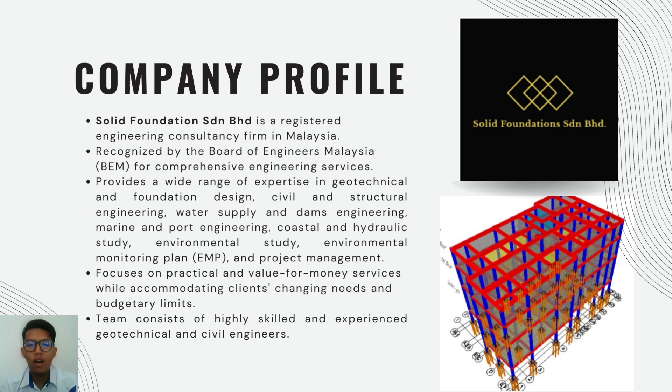Next, about the company profile. Our company name is Solid Foundations Sdn Bhd, a registered engineering consultancy firm in Malaysia. We are recognized by the Board of Engineers Malaysia (BEM) for comprehensive engineering services. We provide expertise in geotechnical and foundation design, civil and structural engineering, water supply and dams engineering, marine and port engineering, coastal and hydraulic study, environmental monitoring plans, and project management. We focus on practical and value-for-money service while accommodating clients' changing needs and budget limits. Our team consists of highly skilled and experienced geotechnical and civil engineers.

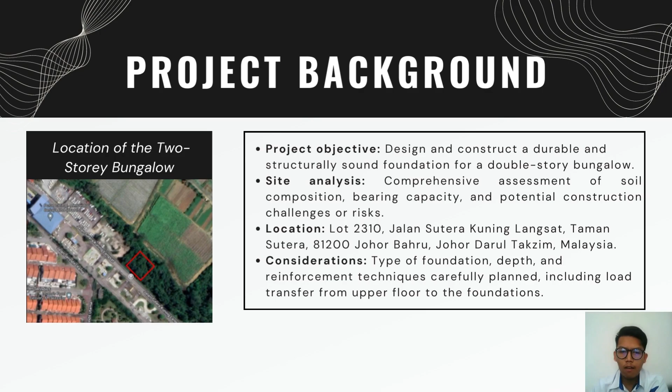Next, for the project background: the project objective is to design and construct a durable and structurally sound foundation for a double-story bungalow. The site analysis is a comprehensive assessment of soil composition, bearing capacity, and potential construction challenges. The location is Lot 2310, Jalan Sutera Kuning Langsat, Taman Sutera 81200, Johor Bahru, Johor Darul Takzim, Malaysia. The consideration covers the type of foundation, depth and reinforcement technique carefully planned, including load transfer from the upper floor to the foundations.

Assalamualaikum and hi, I'm Muhammad Syahrin bin Azahar and I will be presenting our literature review, starting with site investigation. It is an important part of the foundation project which gives significant knowledge about the geotechnical characteristics and ground condition of the site. It is a methodical and thorough investigation of the location to acquire the information required for planning and building a solid and secure base.

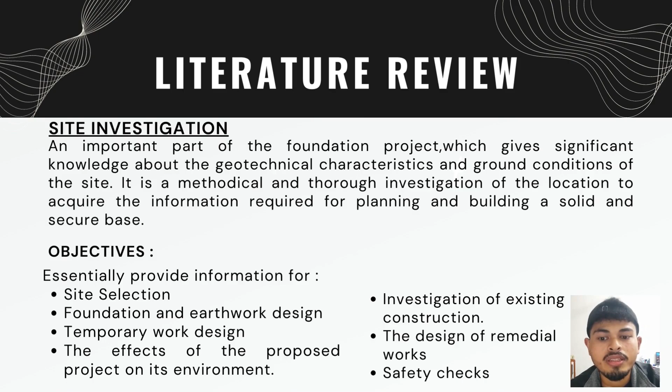The objective is essentially to provide information for site selection, foundation and earthwork design, temporary work design, the effects of the proposed project on its environment, investigation of existing construction, the design of remedial works, and finally safety checks. There are basically 4 components or phases in site investigation: Phase 1 is literature search, Phase 2 is reconnaissance and subsurface exploration, Phase 3 is laboratory testing and reports, and Phase 4 is detailed site investigation.

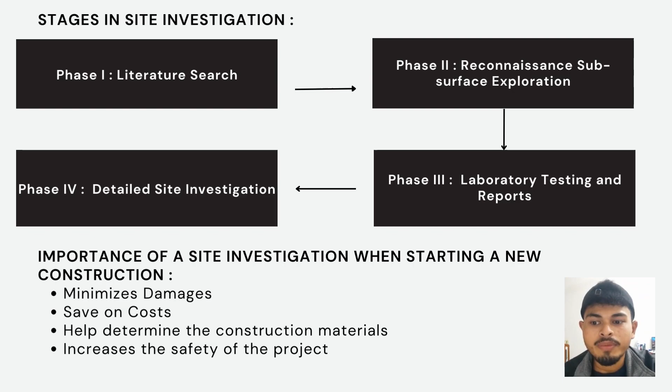The importance of a site investigation when starting a new construction is basically to minimize damages, save on costs, help determine the construction materials, and increase the safety of the project.

Next, we jump to borelog data. The term borelog data refers to information gathered during the drilling and sampling of a borehole or well, also known as geotechnical logs. Borelog data normally consists of a variety of measurements and observations depending on the goal of the drilling and the necessary information. For our project study, we selected borehole 1 for borelog data analysis.

From the figure we can see an example of the borelog data that we used. From this borehole data, we managed to identify the type of soil and all the data and information needed to make the calculations.

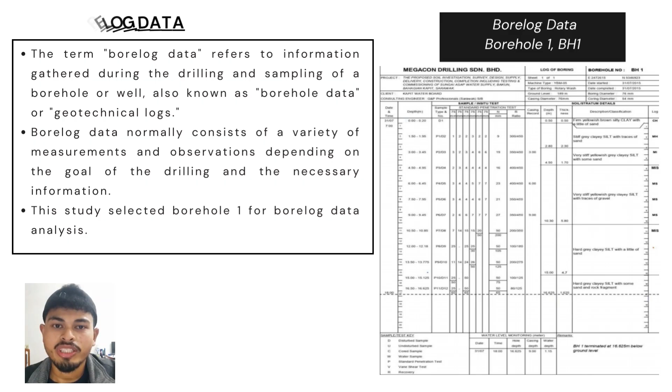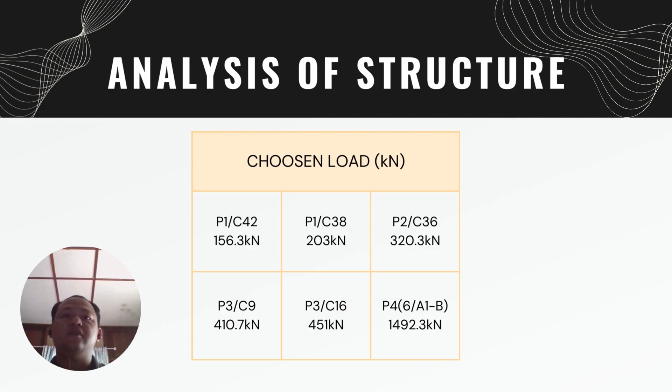Now we go to the methodology of our project. First, we calculate the bearing capacity and settlement using the Meyerhof method in clay, assuming phi is 0 degrees. Then we calculate Qs using the lambda method because it is clay soil. Then we calculate the ultimate Q, which is the ultimate load, assuming group pile. Lastly, we check the settlement using the Meyerhof method.

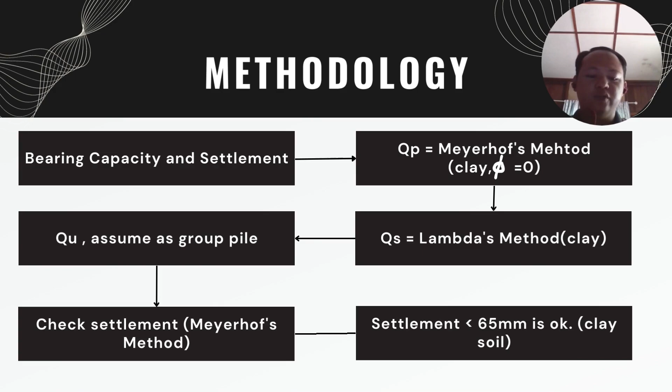The settlement under 65 mm is okay because it is clay soil. Only P3 is not okay; the others pass for the settlement.

Hello, my name is Asyikin binti Muhammad Azhari and I will explain about the pile calculation.

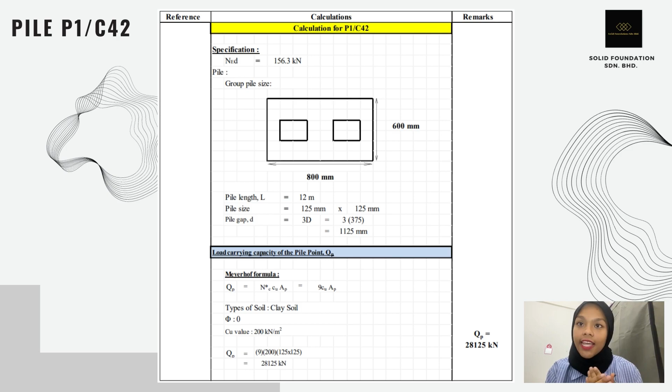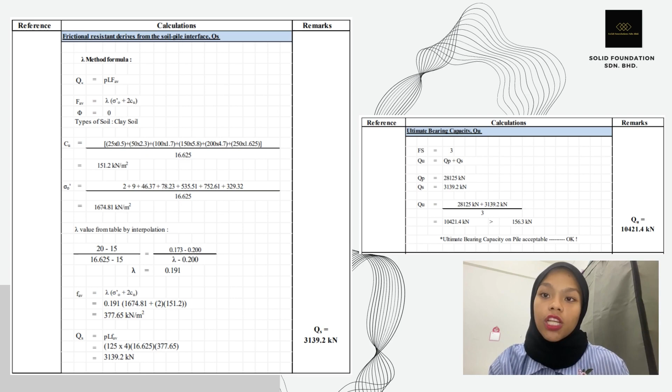Okay, so the group selected pile P1 for the presentation purpose, which is this pile carried a load of 156.3 kilonewtons. As for the QP calculation, we used the Meyerhof method and got the value for QP as 28125 kilonewtons. As per the QS calculation, the group selected the lambda method to get the value for QS, which is 3139.2 kilonewtons. As per QU, which is QP plus QS divided by FOS, the value is 10421.4 kilonewtons, which is more than the actual load on the pile of 156.3 kilonewtons. So the ultimate bearing capacity on the pile is acceptable.

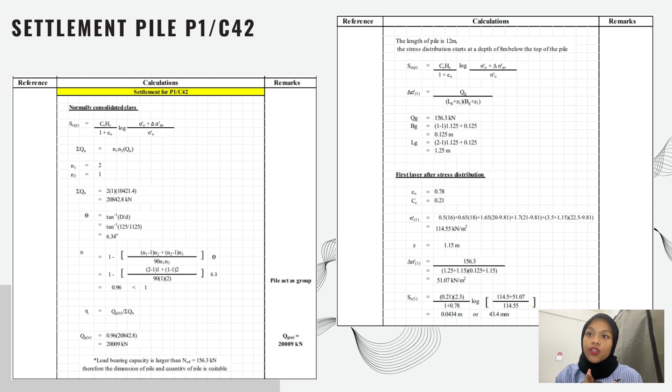Next, we move to the settlement for pile P1, where the clay layer is assumed to be normally consolidated clay. The pile used in this study acts as a group, and the value for QGU is 20009 kilonewtons. For the settlement, this group was analyzed by 3 layers. The first layer, after the stress distribution, gives a value of 43.4 mm. For the second layer, the settlement is 3.8 mm, and for the third layer, it is 1.2 mm. So the total for all 3 layers for the settlement value is 48.4 mm.

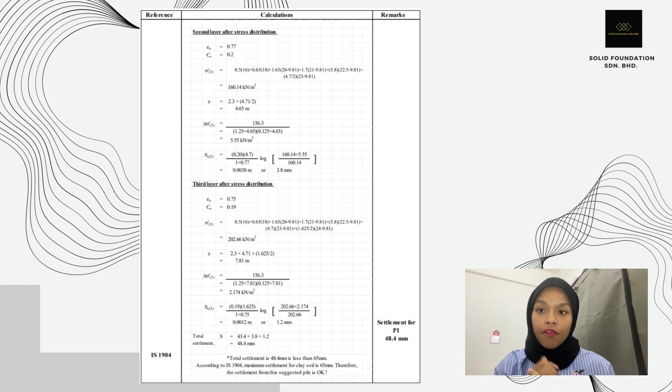The settlement value for P1 is acceptable because it's less than the maximum settlement value, which is 65 mm. So the settlement results suggest that pile P1 is okay.

For discussions and recommendations, we explain about 6 aspects. The first one is site evaluations. We use borehole log data indicating clay soil composition, and the safety factor value is 3, which is considered for structure strength. The second one is project scope, which explains that the project involved collecting and analyzing borehole data, conducting foundation design, and performing safety inspection. The knowledge and experience gained will be available for future projects.

For the method used, we use the Meyerhof method and lambda method to determine bearing load capacity, and for determining settlement we use the Meyerhof method. For the pile foundation, we chose this to support the load from each column.

For the evaluations of pile foundation, we have pile foundations P1, P2, P3, and P4. We assess, determine the design load, and suggest the foundation design size. For the settlement check, the maximum allowable settlement in clay soil is 65 millimeters, and settlement checks are conducted for all pile foundations, revealing that pile P3, which is C9 and C16, exceeded the allowable settlement limit.

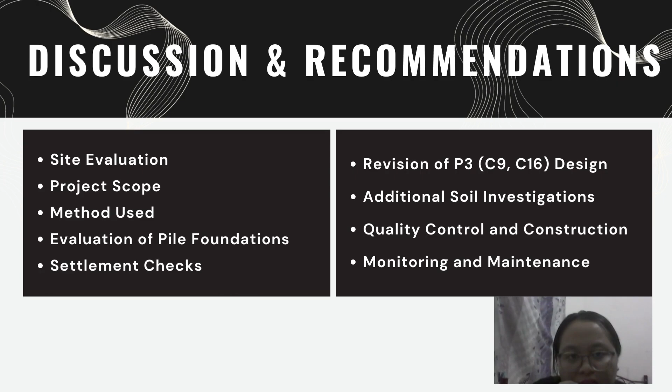For the conclusion, we derive from data based on project background and also calculations: a solid foundation for a double-story bungalow was successfully designed and constructed following calculations and adherence to the standards. The chosen pile foundations consisting of 12-meter concrete piles, accommodating a load range of 156.3 kN to 1492.3 kN.

Calculations confirmed that the ultimate bearing capacity of all piles meets the required standard, using two methods: the Meyerhof method and the lambda method. For the settlement calculation, we indicate that pile 1, pile 2, and pile 4 did not exceed the maximum allowable settlement, which is okay, while pile 3 does not meet the standard, which is not okay. So we need to redesign the pile.